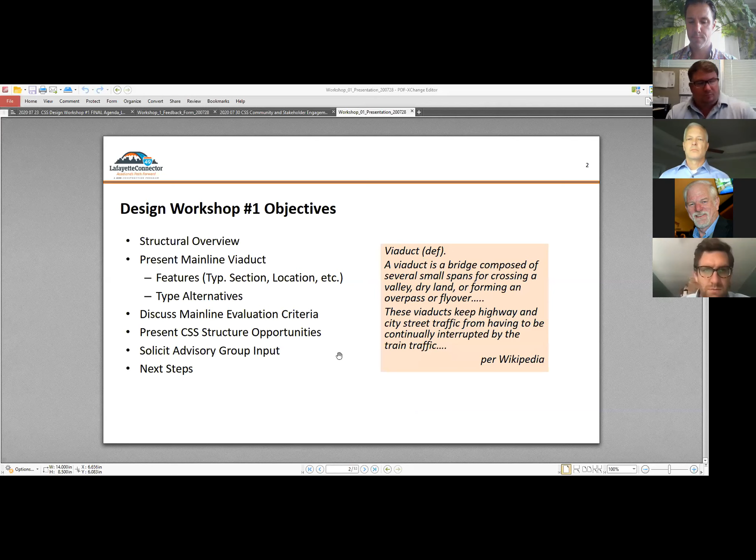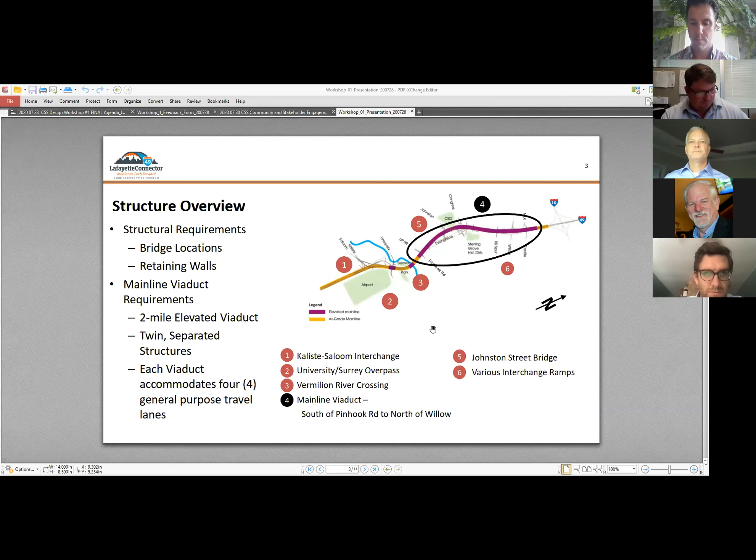All right, thanks Gary. Steve Haynes with Denver staff, I've been working with Gary on this project since about 2016. We wanted to take this time to hear your thoughts, so I'll go ahead and share my screen with the presentation that was provided here yesterday. What we want to find out are your thoughts on some of the aspects of the project, and I'll be asking questions hoping you folks can provide some responses. We've presented our structure overview and given the mainline viaduct layout for your review, and we also had the question and answer document passed out as your homework to provide responses, and we're anxious to see what those are. As you know, the project extends from I-10 down through the airport area, so we don't need to belabor that.

We want to try to get right into the alternatives and so forth. Let me see, I may not have shared this correctly, so I might have stopped sharing and need to redo this. Let me redo that - stop sharing, I need to share my desktop, I think. Sorry about that.

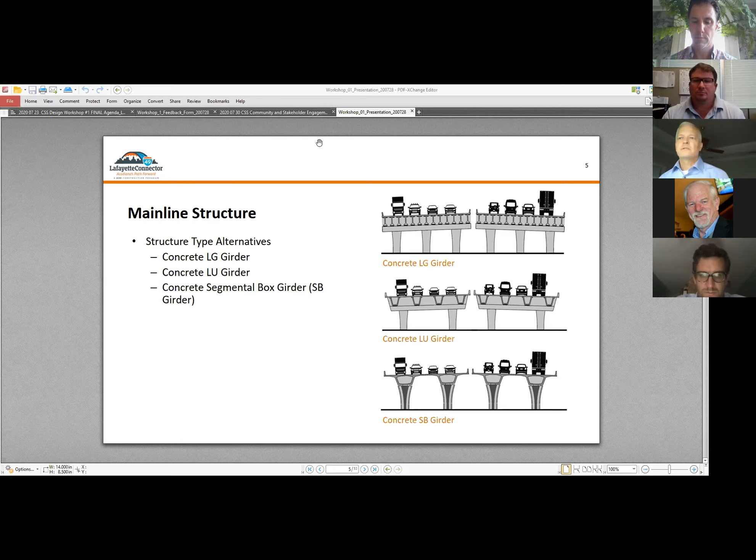While he's looking for that, can you guys see the slide on the screen with the 3 girder types? Whoops, yeah sorry. It's okay, go right ahead. Yeah, so let's get that.

All right, here we go. Okay, all right. So it disappeared on me.

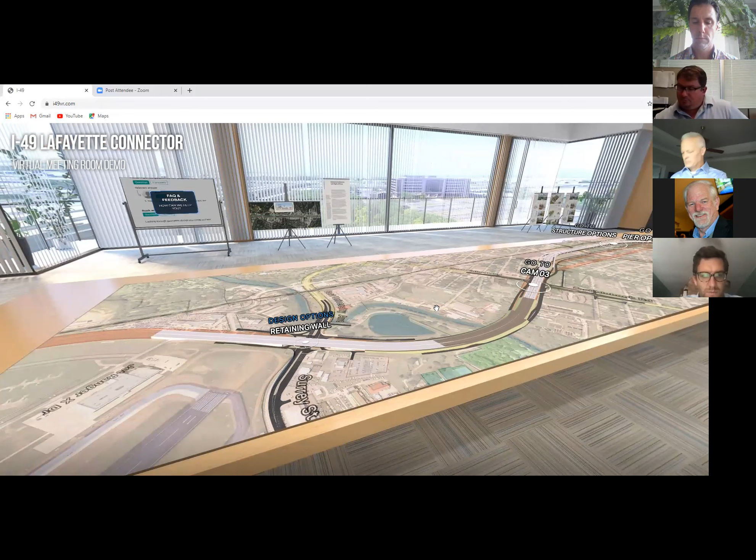Apologies. So in our meeting room here, we've presented a lot of information, and starting with some of these items and elements, we wanted to get your feedback, beginning with some of the retaining wall alternatives. Our goal is to determine what textures and so forth are favorable to everybody, these context sensitive solutions.

It's all about representing safety first and foremost, but also the historical and aesthetic elements near and dear to the community's heart, showing what you'd like to see presented in your community as far as graphics and so forth. If you have other patterns that can be presented or considered, that's a possibility, because these MSE type walls are precast panels that can have all sorts of elaborate patterns, and they repeat those kind of like a mosaic, like in a shower stall. Each panel that goes up can have that particular pattern, but it has to repeat to some degree to maintain economics.

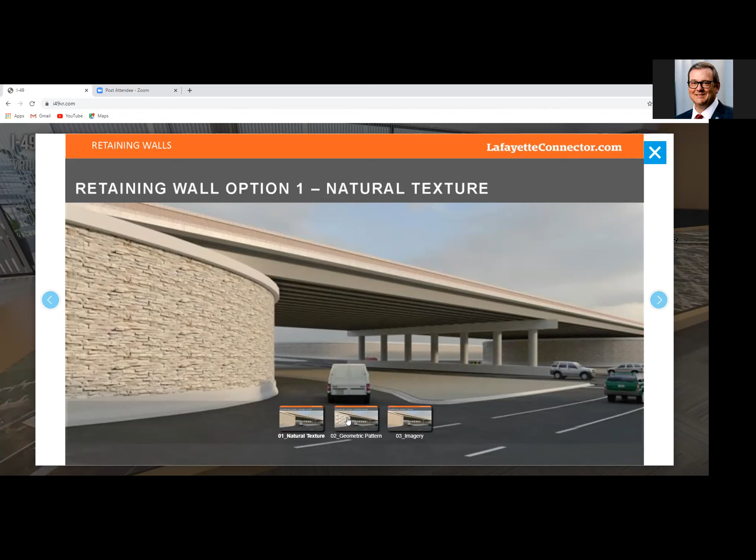Yeah, I don't think, this is Troy Wayman, I'm not sure there's been a lot of consideration. There was a question that came up Tuesday on the call about these patterns. Personally, I really like the natural texture, but I also recognize there may be more opportunity to show our culture in some of the other patterns, which makes a lot of sense. But the question came up, and I don't think it was ever addressed because it got lost in the chat, was: do any of these textures, like the natural one for example, that looks great, but considering the environment we live in, keeping that clean would be a lot more difficult than some of the other patterns.

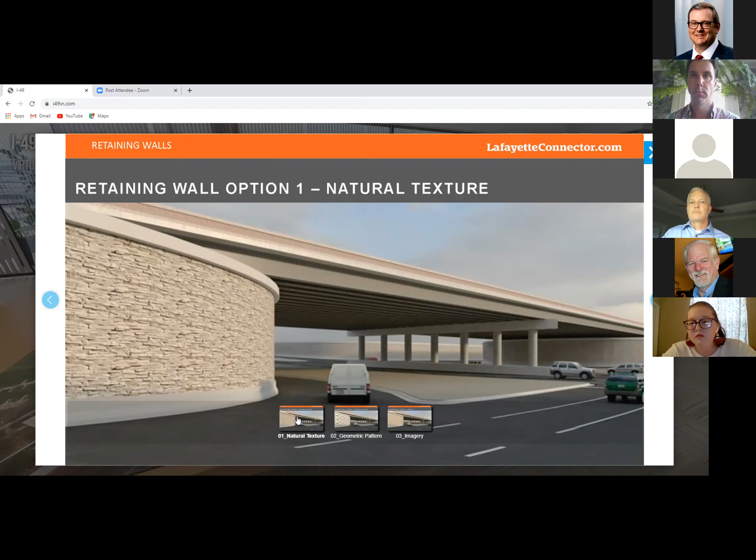Yeah, so looking at it from just a sustainability point of view, I suppose. Right, right, and there's some finishes that are more of a deterrent to graffiti than others. This one may not be one of those. I don't know, but I was thinking more of things like mold and mildew. Oh, okay. With the humidity and the amount of pressure washing we have to do to our houses and things like that, it's pretty significant. So yeah, okay, we can mark that down there.

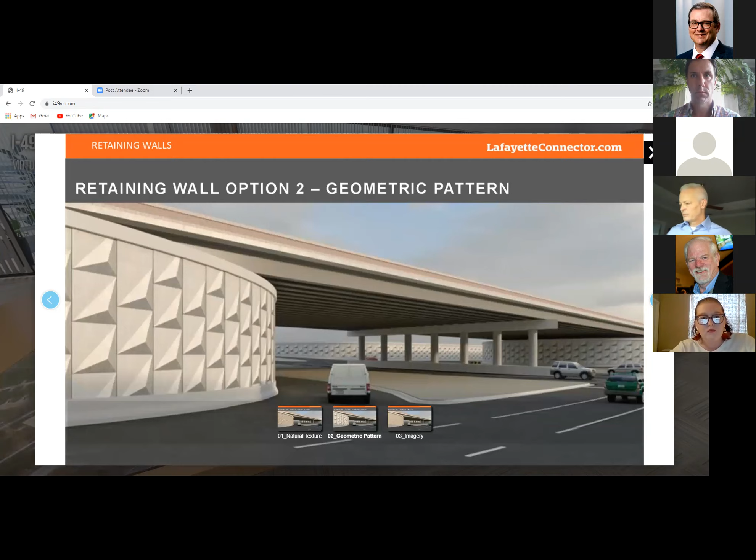So any other comments on the walls? I mean, I think it's a fair point from Troy, this is Sam. But I think there's an economical way to have something that's a little more unique to the space and area through a printed pattern that shows local character, I think that could be highly desirable. It would be interesting to see what effect that has in terms of maintenance. But I could see that being a really great way to plug in the local community and show them reflected in this big project.

Agreed, agreed. When you think of local community, what sort of patterns come to mind from your perspective? I couldn't say specifically, but I think having the opportunity for some sort of local engagement in that process, I think about either local flora. I know y'all pointed out the Palmetto interchange or whatever that was in Florida, but flora could be part of it. There's certainly a lot of native plants that could be conjured, especially thinking about the trajectory of this roadway going across the Vermilion. But certainly other, just kind of architectural elements from the community, there are certain styles specific to the areas the road goes through.

Or who knows what. But I think the opportunity for a little bit of public involvement within very specific boundaries, obviously, could be really well received locally. And it's some thought that local involvement and commitment to some of these patterns provides a sense of pride that is also a deterrent to some vandalism, but that's subjective of course. But it's definitely important to get them involved in the engagement aspect.

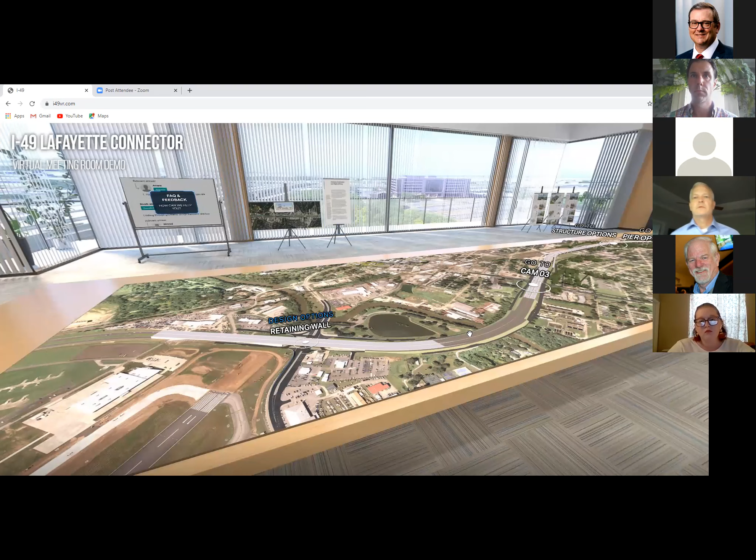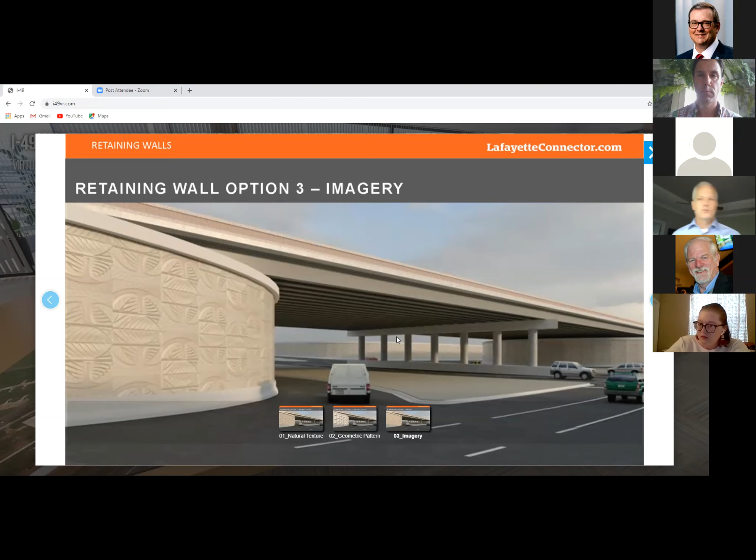Let me just chime in for a second. That's great feedback, that's really what we wanted to hear. And Bradley, who presented on Tuesday, he's got some excellent ideas how to work with the communities. He's done that many times before on different types of projects like this. So he's going to be an excellent resource to really dig down with you guys, with the communities, the neighborhoods, and really settle on a theme, whether it's more the natural texture or the imagery or something else even.

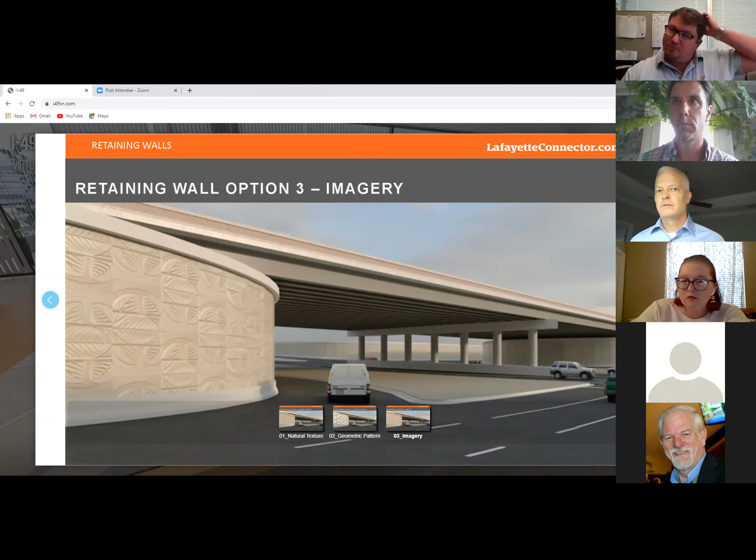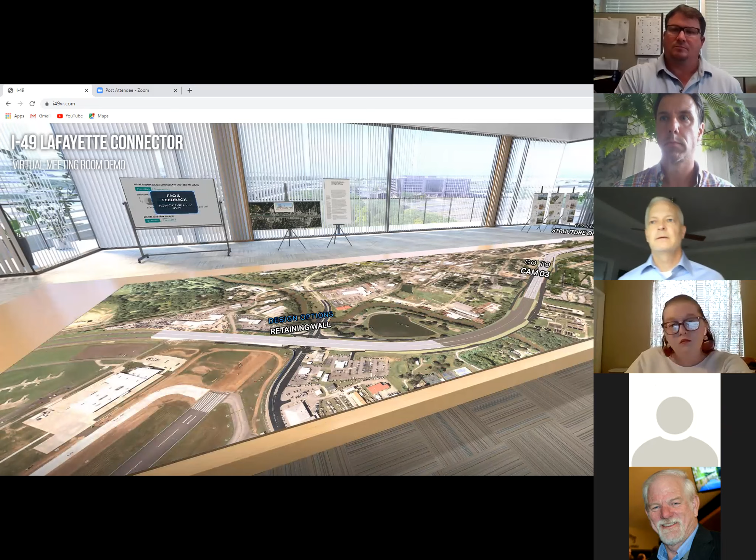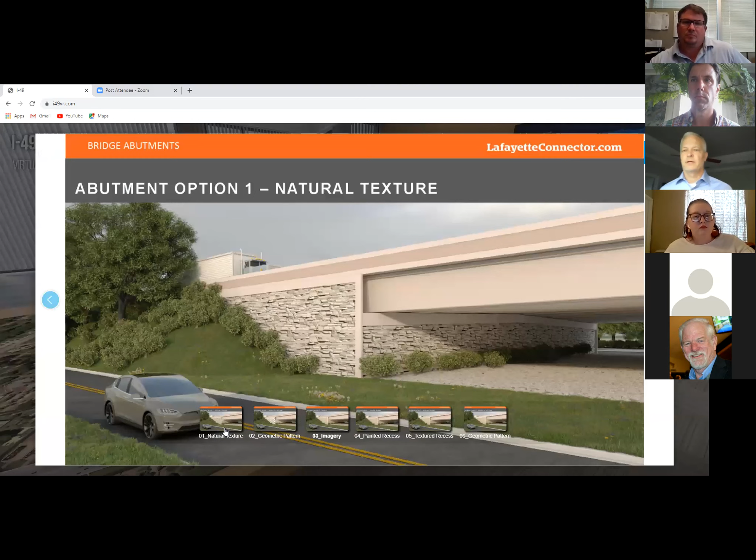How many retaining wall areas like this are there throughout the project? Well, we've got a bridge abutment type wall up between Willow and I-10. And then once we come down off the elevated structure on the south side of Pinhook, there will be another similar opportunity for that type of wall. And then for all the ramps, they will have abutments as well as they come down from the bridge elevated structures and tie in closer to grade.

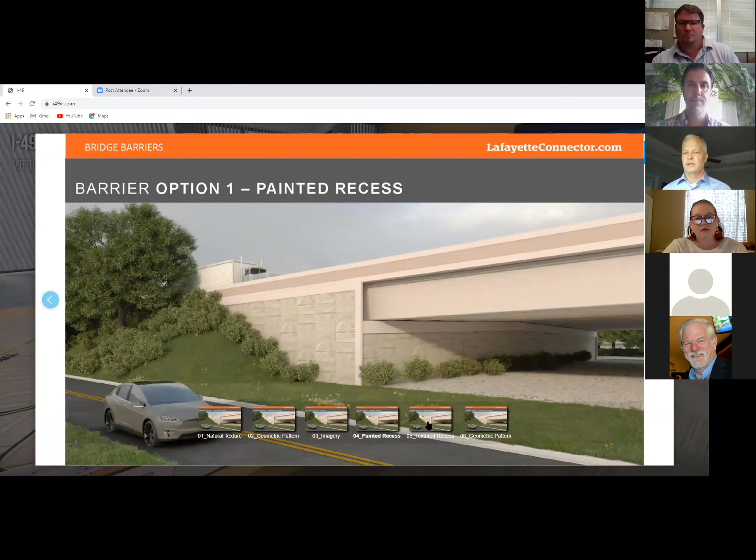So at each of the bridge ends, that's really where we have one of the opportunities to do something like this. It doesn't have to be just one theme. Take a project that went about 9 miles through Denver, where they varied the themes along the project. It had an overall theme, and then it graduated from one type of environment to another, from the mountains down to the plains.

So there's nothing to say that once you pick a pattern, that's all that's allowed. And that's a good point too, because we mentioned the big long viaduct structure with the two bridge ends and the ramps in between.

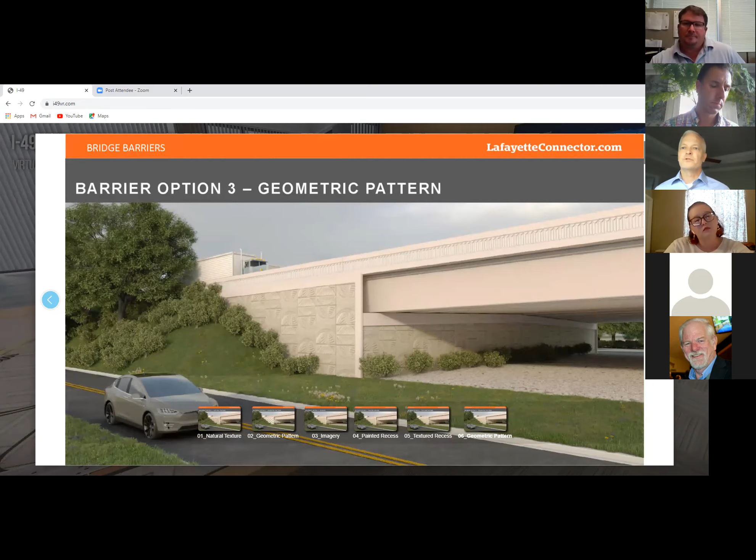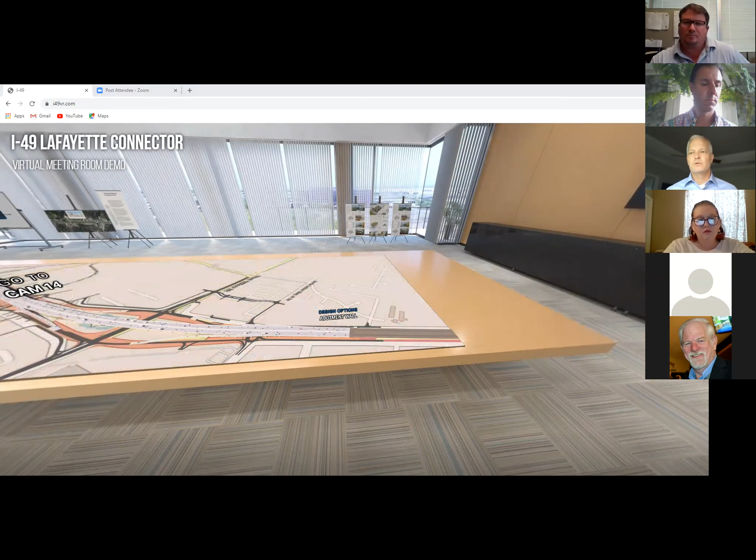But we also have some fairly significant sections of wall in the University Surrey interchange area. We haven't sketched those up just yet. We're still working on fine tuning the horizontal and vertical geometry, but that's going to be another opportunity. It's close to the airport. I know in the previous phase of work, Steven Picou, the airport director, really wanted some input and make that interchange kind of a gateway to and from the airport areas.

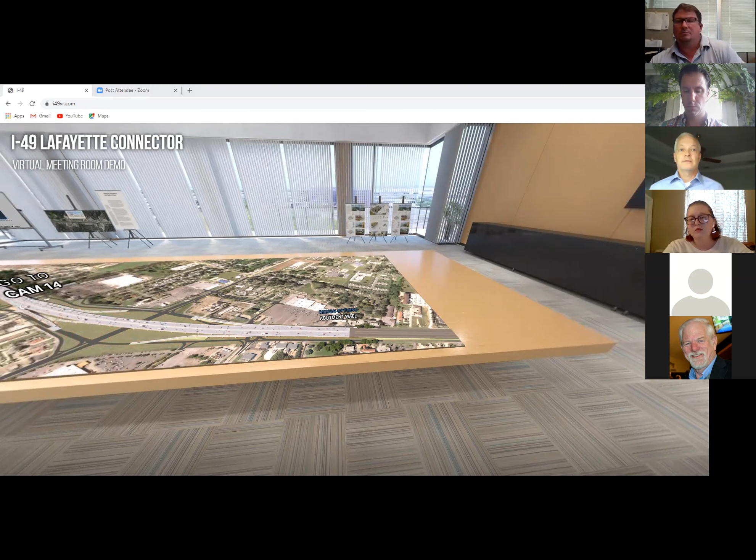So that's another opportunity to either do something different or tie a similar theme along the entire corridor.

Absolutely. And I think if the opportunity exists for them to be different distinct spaces, each of those is an opportunity for a little community engagement and a little more buy-in locally. If that's an easy way to do that, which it sounds like it might be, then I think that's a great idea.

Stephen Parati here. I would echo that opportunity to tell a story at each wall opportunity that is relevant to the area in relationship to that wall. Two other quick thoughts. I would say I'm not in favor of a natural texture, because while I'm new to Louisiana, I'm not sure of natural textures that would be used, so it'd be a completely faux facade. It disenfranchises. It tells a false story, just my opinion.

And secondly, it would be great to tell a different story that reflects the community on either side at each intersection, but is that going to add costs? I hate to belabor the cost thing, but it all comes down to money eventually. I don't want to set ourselves up for, yeah it's a great idea, but if it's not a reality, let's nip that type of stuff in the bud early so we're not setting ourselves up for disappointments later on.

Yeah, the panels are form liners, and the form liners can be created by artists and so forth. Each one does have a premium to it. I wouldn't say that it's extravagant, depending on how repetitive the panels are over such and such a distance. But it's not like you're going to create a new panel for each wall necessarily, but a new theme.

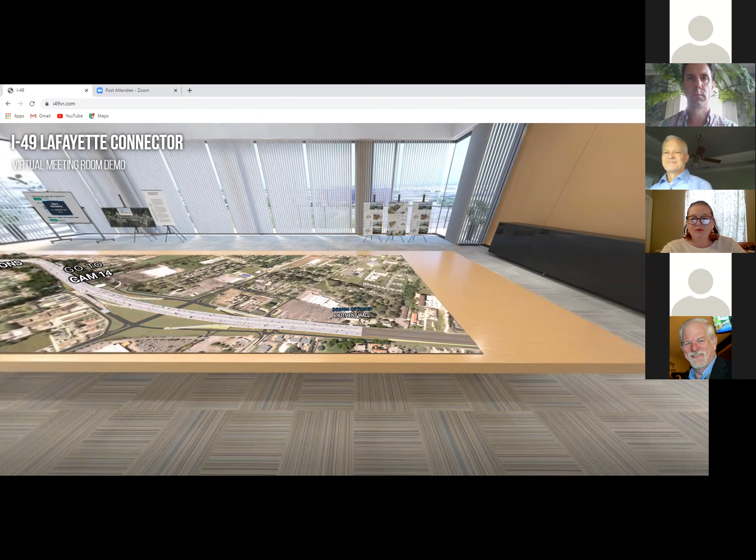But I'll let you guys talk to that. So, enough for me. All right. Any more on walls?

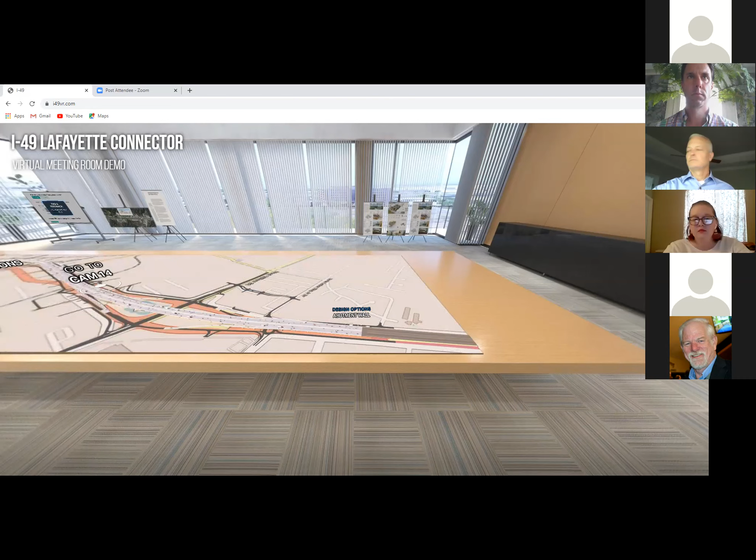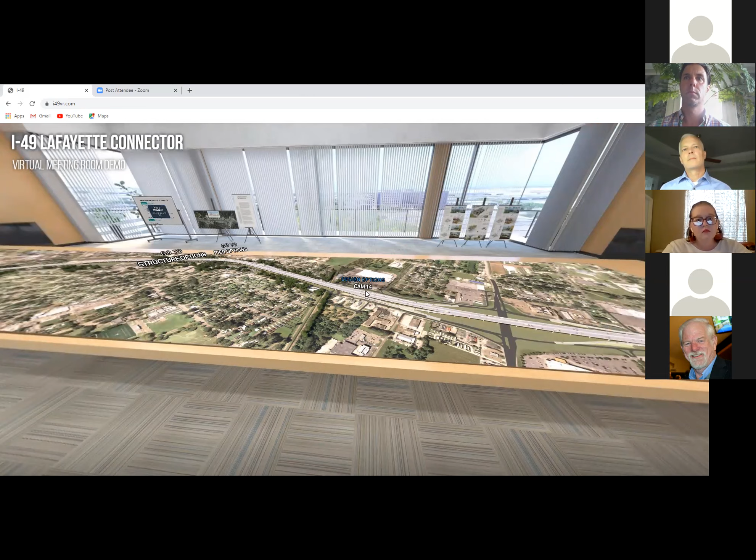Okay, let's go right now to some of the design options as far as the girders and piers and so forth. What are the thoughts on the depths of the girders, the heights of the columns, and the types of girders?

Right here we're looking at the line girders in a 22-foot scenario, and then we get the change in column type. So a lot of options here to consider, not saying we've exhausted all the opportunities. Here you have the U girder shape and a different column style. The capitals change, that's another column shape, and then this cone shape.

Had much thought been put into reviewing these, or should we throw all these out and start over? So let's speak if you have any thoughts on that. What was the SG girder, the final one that was kind of in the list? The SG, yeah, I know it was the most expensive on cost, but it was also a little less expensive on...

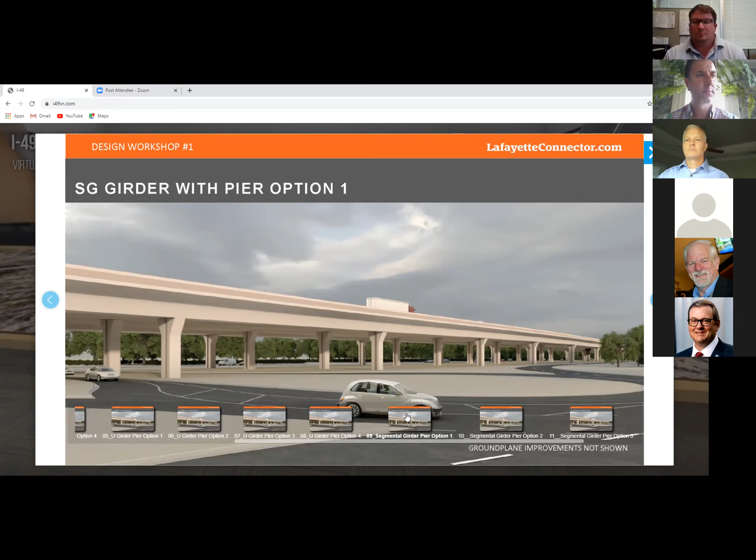Yeah, this one opens up. The segmental has some advantages. We believe it's a little more complex type of structure to build, but we have such a long viaduct that the repetition really allows for some advantages with respect to schedule, maintaining span lengths such that you can construct from pier to pier, minimizes the shoring, and also it's just very, very clean on the bottom of the structure without the pier caps.

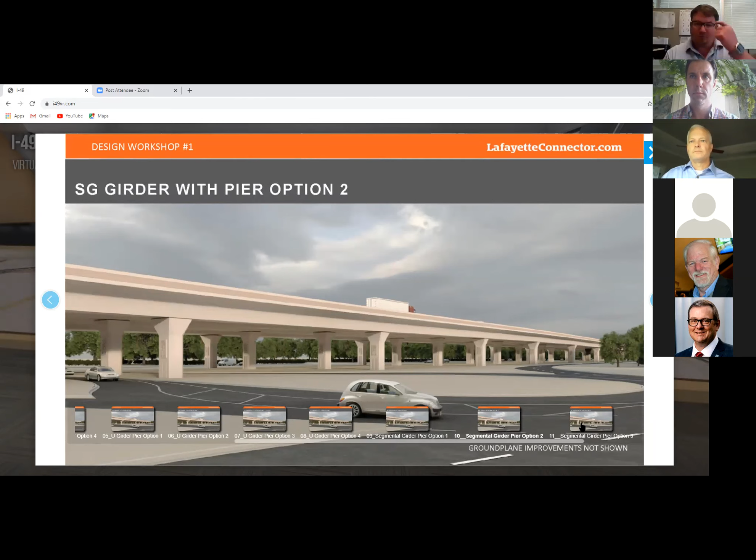You just compare, looking at the pier caps that tend to clutter, and then you can compare it to this one, the segmental, and just how clean it is overall is really appealing I think. And the heights too can be adjusted to allow more light underneath. There was some talk about having public events underneath the structure, so having fewer columns and an openness about it has a lot of merit, letting more light in, etc.

So just on my limited understanding from the presentation yesterday, it would seem that the SG girder, having less structure, less piers, a cleaner look, would allow more continuous neighborhood to neighborhood connectivity. And also, I think the very first one, the LG, there was a diagram that showed how many planes there were.

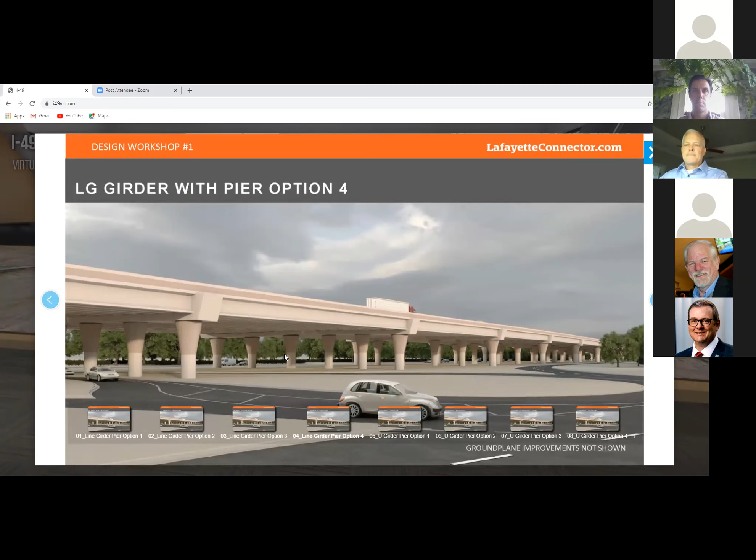Okay, it makes a lot of sense. Yeah, and I mean, you see some of these where I'm not sure what problems you might have there, but in some areas you have sparrows and so forth. They create nests underneath these things and on the bottom flanges of the line girders, so that can be a maintenance headache.

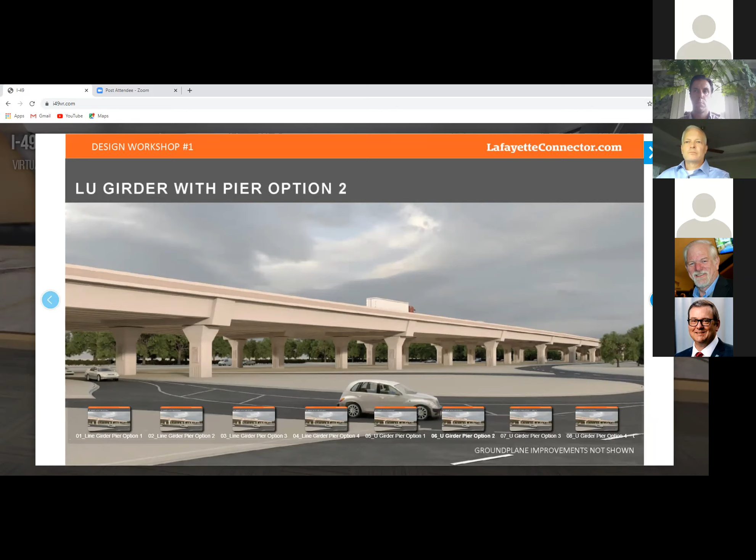But either one of these, the U-girder or the segmental - of course the U-girder still has the cap, the drop cap, so there's that visible feature as compared to the segmental. I looked at it and how just very clean underneath, that's the advantage of it.

And also we're seeing a possibility of a schedule advantage, such that I believe the segmental might cut about 12 months off the construction period of the project, and also minimize the amount of false work underneath. So the MOT, maintenance of traffic, becomes a lot easier to deal with. And while we're on maintenance of traffic, has much thought been given to that by the communities?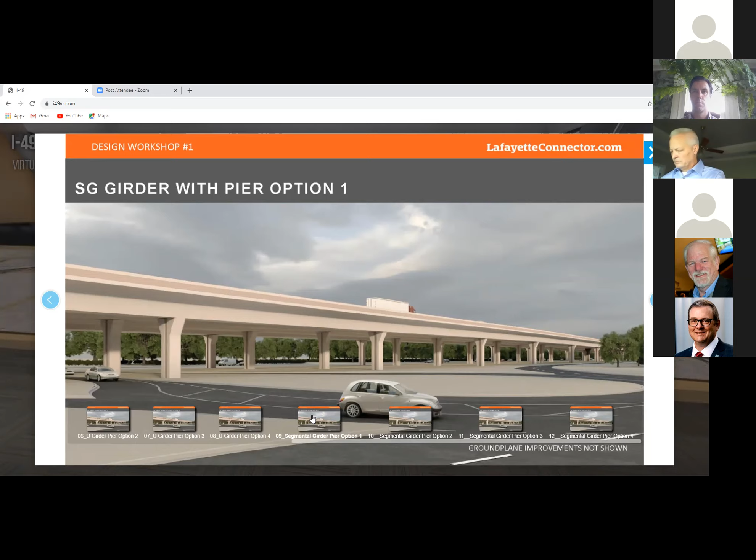Well, just staying on the topic of community connectivity before we move away from that - I do think from that perspective, number of obstructions is one thing, but also the broader visual obstruction of the road itself. I know we saw the difference between the 22-foot height and the 30-foot height. I don't know if we're talking about that later, but to me, when we talk about connectivity between neighborhoods and walkability and the possible uses of the underspace for any purpose other than blight, that further raising of the structure is more impactful to me than any of the other girder or cap methods.

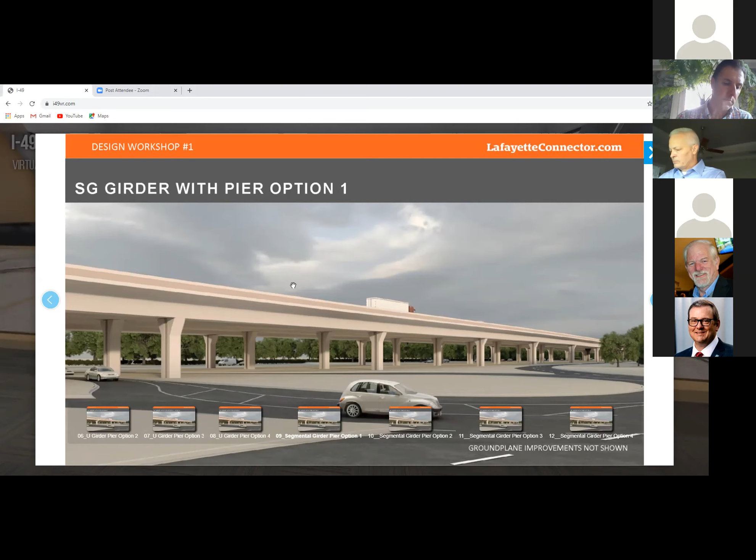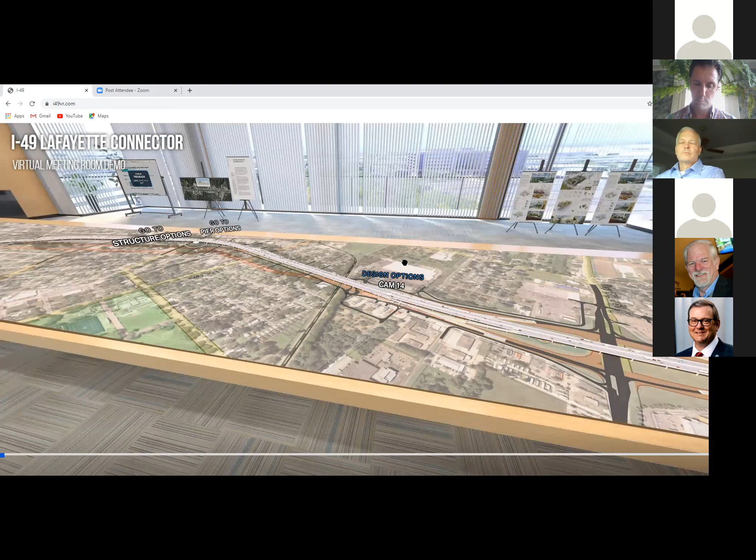I think that one carries just more value, especially when we were just quoted offhand the like $15 million differential versus maybe a 70 or $80 million differential for one girder type to another.

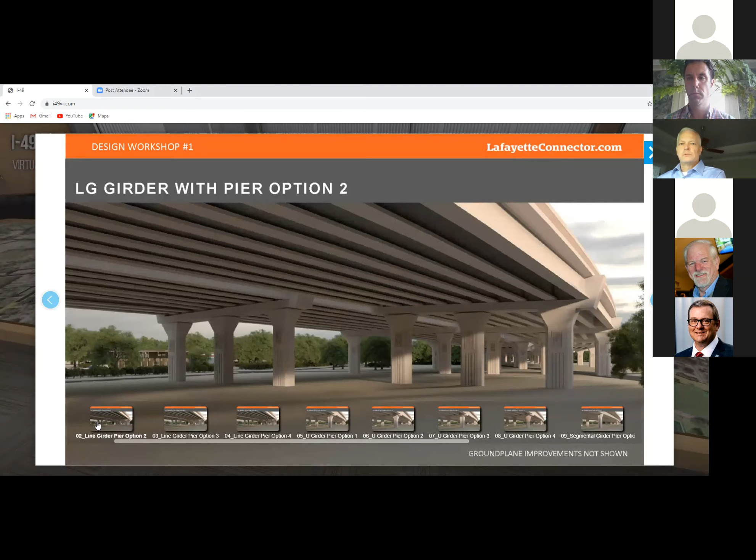Right, and here we're looking at some of the heights and so forth - line girders, U girders. I'm a real visual person, I need real world examples. Are there examples?